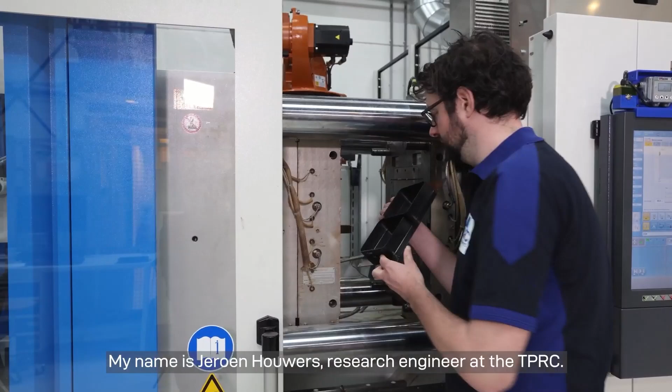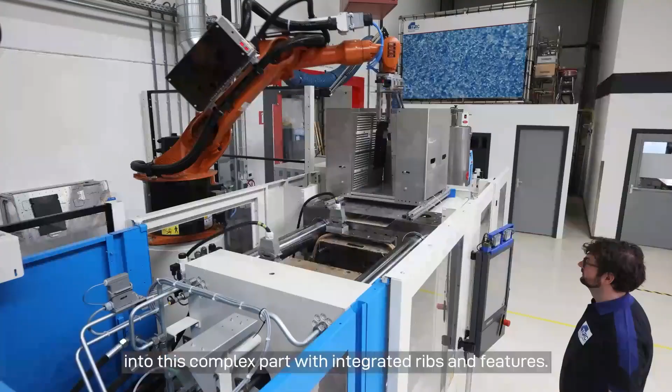My name is Jeroen Houwers, research engineer at the TPRC. Today I would like to tell you about the research into overmolding. Overmolding is a hybrid process which combines stamp forming and injection molding together into a single process. Within a few minutes we can transform this sheet into this complex part with integrated ribs and features. As a part designer, you can combine the strength of the thermoplastic composite sheet together with the design freedom of the injection molding process. However, there's still a knowledge gap to overcome to adopt this process in the industry.

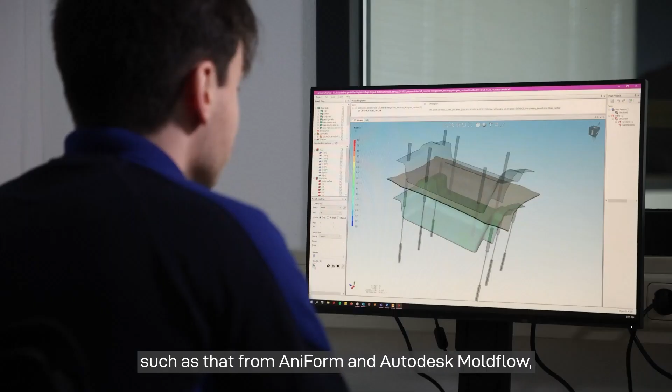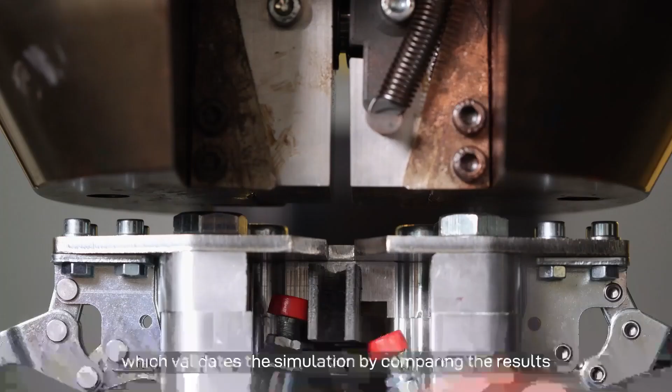In order to reduce the number of iterations needed and get first-time right tooling, we rely on a variety of simulation software packages, such as that from AniForm and Autodesk Moldflow, which we then couple together to simulate the whole overmolding process. The final step is to perform a structural analysis, which validates the simulation by comparing the results to the mechanical performance of an actual part. We're also researching the interface strength of different material combinations by performing tests on overmolded samples with different parameters. The aim of this is to standardize the process and, in the end, share the resulting datasheets with our partners.

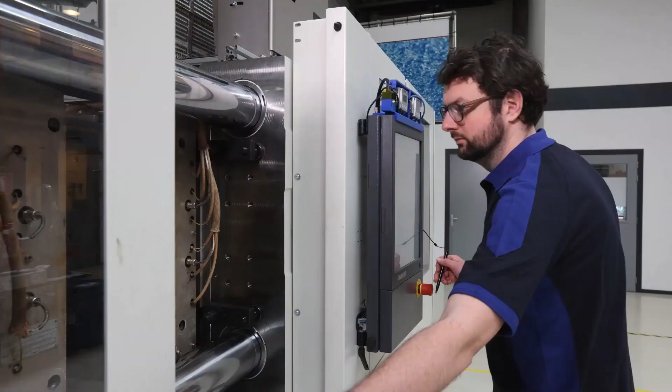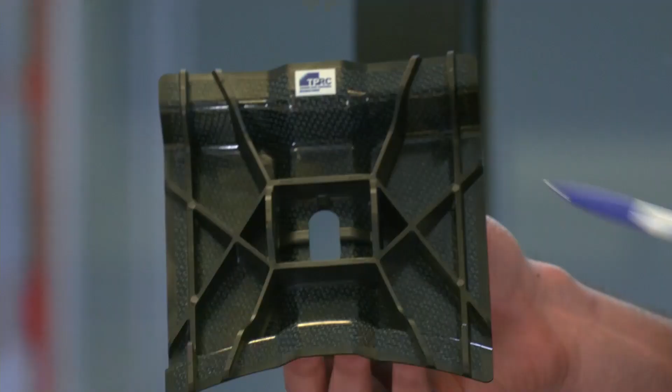Andres Garcia, what did you bring? Well, this is the complete demonstrator from our video. And what I'd like to show you today is, if you look here, for instance, at this place, and if you look under the microscope, if you make a cross-section out of it, then you can... perfect, you see the picture on the screen now.

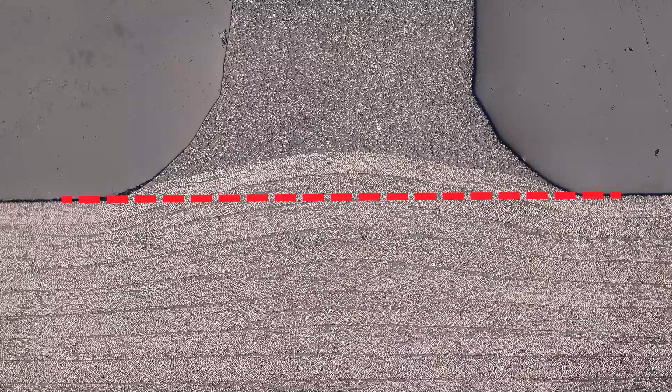What you see here is on the top, you see the injection molded compound, and on the bottom you see fibers. So what's happening here is that the fibers from the laminate are partially within the injection molded cavity. And this is what we're calling fiber migration.

And what's happening is that during the process, we heat up a laminate above its melting temperature, and then we place it in the injection molding machine, and the injection mold closes, and at that point the laminate reconsolidates. But at the locations where you have those ribs, you don't have any pressure at the moment. So what happens is that the fibers are pushed in the cavity.

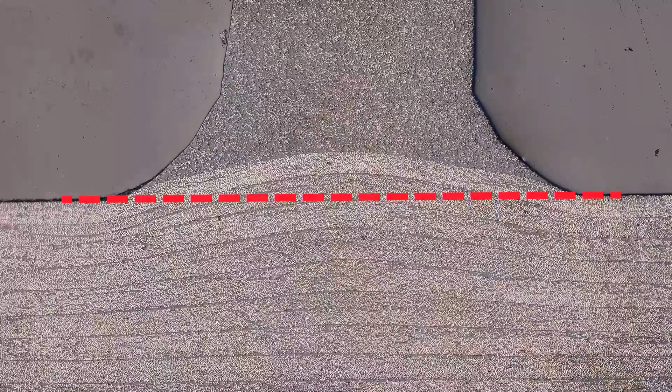We know that this fiber migration promotes the interlocking of the injection molding compound and the fibers, so it makes the bond a bit stronger. But on the other hand, it also influences the compression strength of the laminate. So there's a trade-off to be made, and we're working on tools to check how this fiber migration can positively or negatively influence your part.

Well, when it comes to injection molding, we do that for ages, right? Why is this still a topic? Well, there are two ways to look at this. One way, you can see overmolding as a method of increasing the strength and stiffness of a regular injection molded part. So you can place locally an insert in the part.

Or what you can also think of is enhancing stamp formed parts. For instance, this demonstrator here, we have a stamp formed part, and we can enhance this part by adding these ribs and features. And you can also think of mounting points to ease the assembly of the stamp formed parts. So there are multiple ways how you can use overmolding in your process.

So we've talked about the aerospace industry, we talked about the automotive industry, but there's a lot more potential, right? Battery boxes, gearboxes, electronics. What's the potential here? Well, overmolding has a huge potential because it allows to manufacture light yet strong parts at a very high volume, and they can also be quite complex.

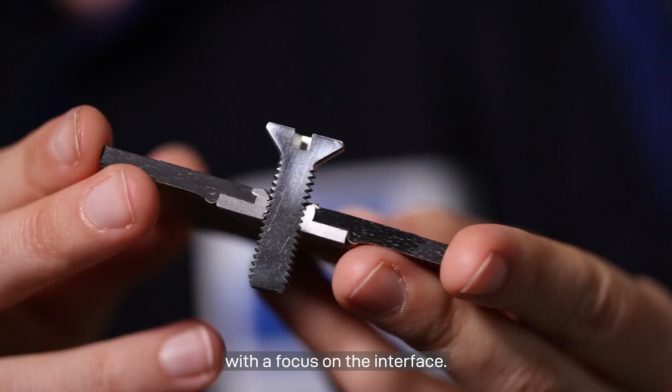My name is Vanessa Marinosci. I'm a materials engineer and PhD student here at the TPRC. My research is on metal thermoplastic composite hybrid joints with a focus on the interface. Currently, the standard joining techniques imply the use of mechanical fasteners or structural adhesives. But when using thermoplastic composites, we can think of a third joining technique, which we call co-consolidation.

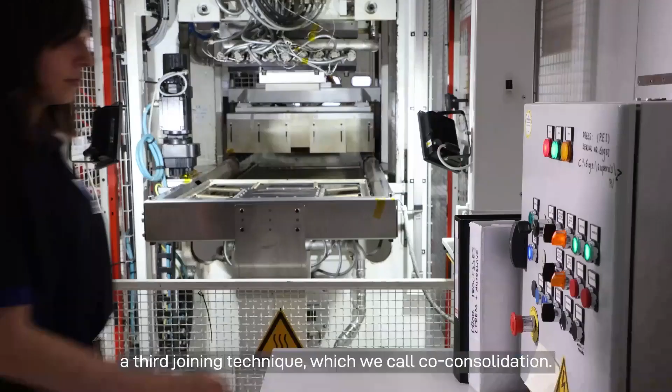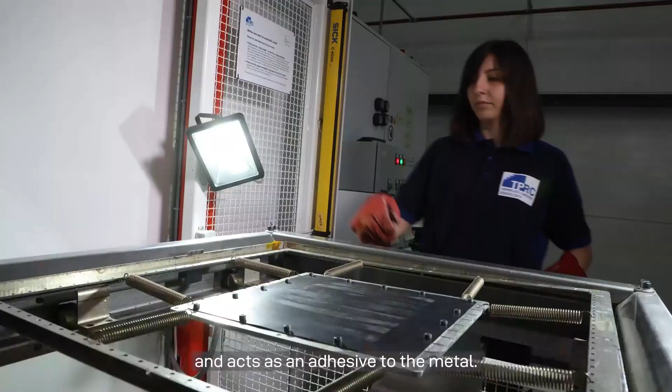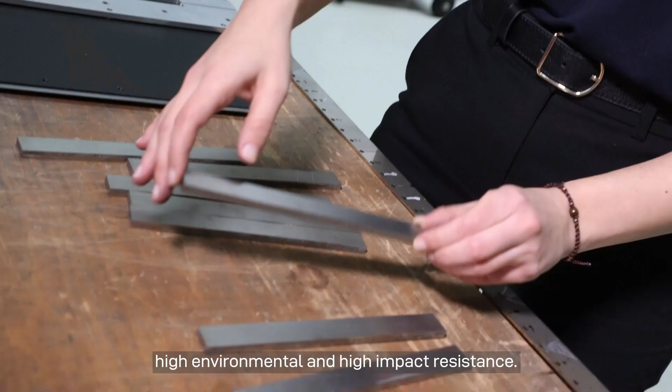With this technology, we can join thermoplastic composites directly to metals during a standard composite consolidation or forming process, because at high temperature, the thermoplastic matrix melts and acts as an adhesive to the metal. An example of a final product that we can obtain is a fiber metal laminate, in which, as you can see, layers of metal are alternated with layers of composite, resulting in a material with superior properties, such as high environmental and high impact resistance.

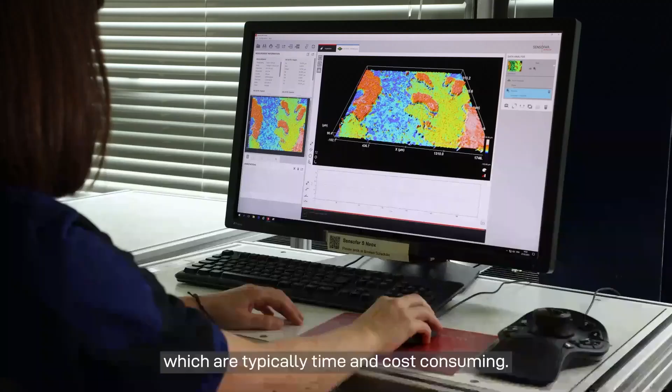Or another example can be a hybrid structure like this, in which a metal insert is already integrated into our composite structure. Therefore, this co-consolidation technology can potentially replace standard joining techniques, which are typically time and cost-consuming. To make co-consolidation a reliable technology, the key, but at the same time the challenge, is to have a proper understanding of the interface.

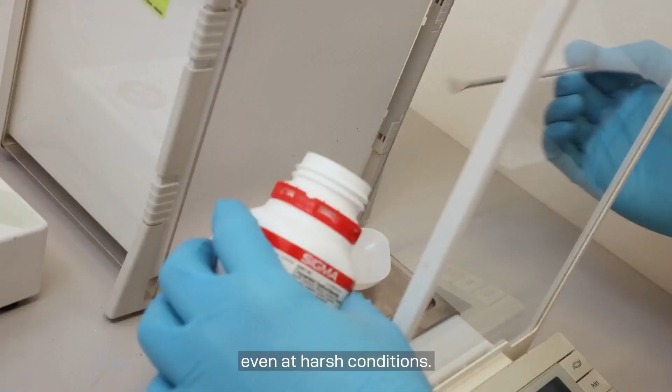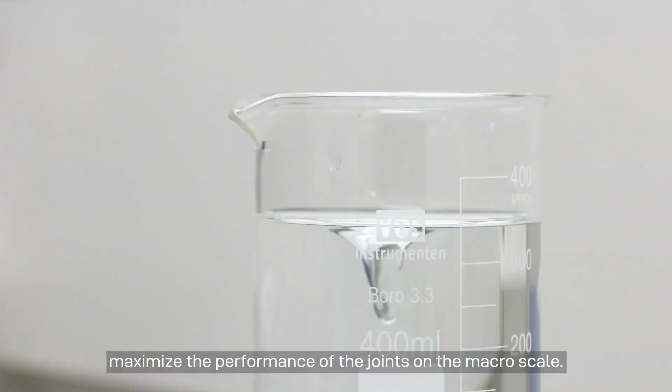Here at the TPRC, in order to tackle this objective, we are sharing our expertise with the expertise at the University of Twente. In this project, I collaborate with Yorgos, another PhD student, in order to approach this interface in a multidisciplinary way. In the metal surface preparation, prior to the joining process, we form thin films inspired by nature, and more particularly sea organisms such as mussels that are able to strongly bind on any surface even in harsh conditions. By incorporating different molecules in these nanolayers, we can tune their chemistry and result in stronger and more durable interfaces. By optimizing the processes at the nano and micro scale, we can maximize the performance of the joints at the macro scale. The aim of our work is to develop an essential and industrially relevant knowledge building block.

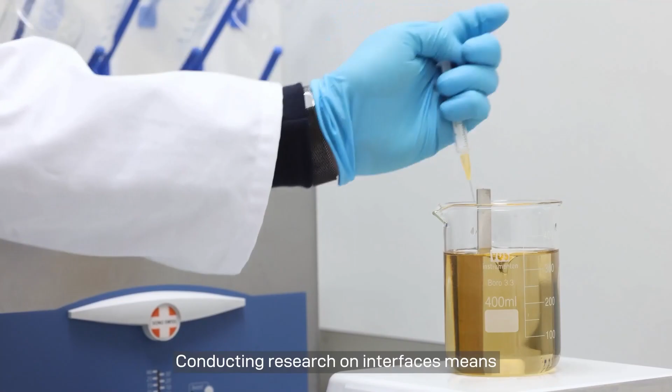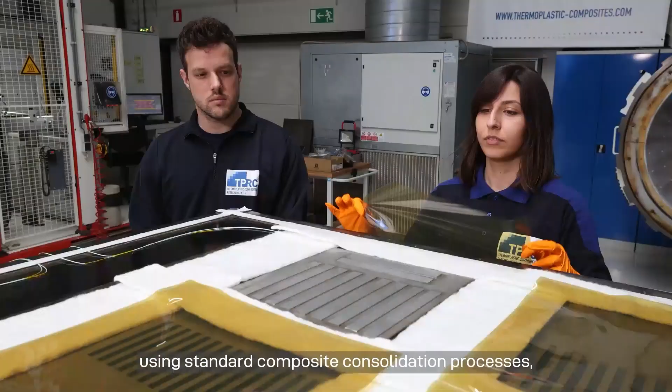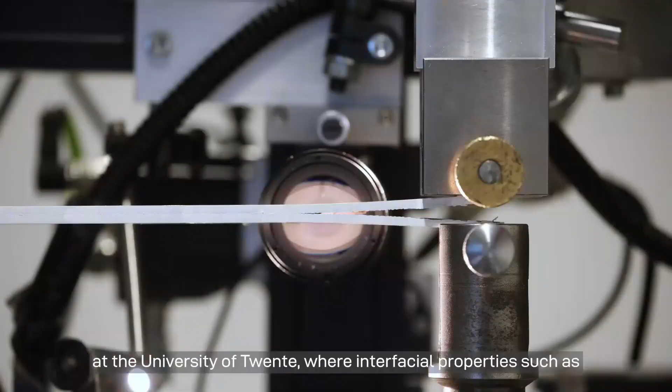Conducting research on interfaces means not just working on a part level, but also on a sample level, which is then mechanically tested. The preparation of these samples is made here at the TPRC using standard composite consolidation processes, such as autoclave or press forming. And afterwards, these samples are tested at the University of Twente, where interfacial properties such as Mode I or Mode II fracture toughness are evaluated.

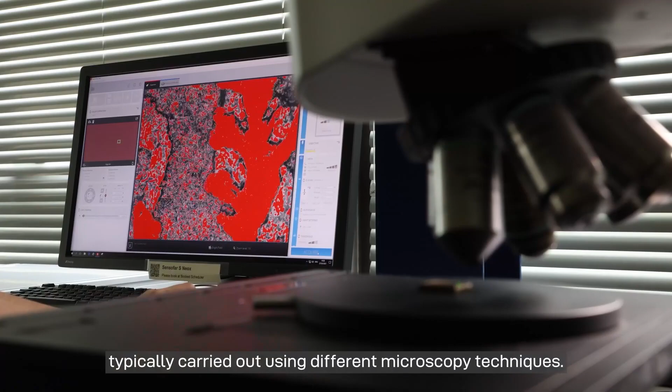Mechanical testing is always followed by an analysis of the failure mechanism, which is typically carried out using different microscopy techniques. Finally, our experiments are input for a numerical model, which enables us to predict the mechanical performance of the interface given certain surface conditions. In collaborating with Yorgos, we learn from each other, and that allows us to share more knowledge with the TPRC partners.

So Vanessa, this co-consolidation technique, do we see that already on the market? Well, not yet, but we do see that in a lot of applications, composite and metals are connected together. And this is currently done with well-established joining technologies such as mechanical fasteners, structural adhesives, or a combination of both.

But since thermoplastic composites are gaining more and more attention, we can exploit the moldable nature of the thermoplastic resin. And therefore, we can think of this co-consolidation technology as a potential replacement to the standard joining techniques, because in co-consolidation, consolidation of the composite and bonding to the metal are achieved in one step. And this, of course, will save time and cost that are typically related to the standard joining technologies.

So what do you think will be the first moment that we see this implemented? Well, difficult to say at the moment because there are many challenges and knowledge gaps. And what are the main challenges? At this stage especially, the biggest challenge is the interface. Because every time we deal with a new or a different material system, we have a new interface with different bonding mechanisms that can occur there. So if we don't understand and control this bonding mechanism, there's a high chance that the interface is the weakest link of the overall structure.

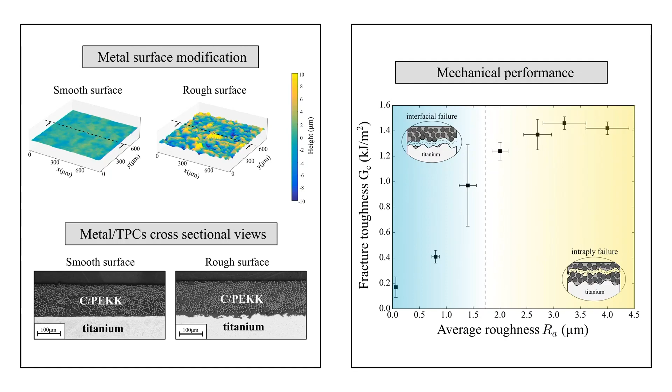Yes, so these images are a summary of one of my recent papers, in which I investigated the effect of this mechanical interlocking, specifically between titanium and carbon PEKK, manufactured with this co-consolidation technology. So how do you look at this technology for the future?

We are finding out that there's definitely potential in this co-consolidation technology. We managed to achieve quite a strong and stable bond between metal and thermoplastic composites, but of course this is just the first step. There's still a lot to do, because in order to build this knowledge of the interface, we mostly worked on a sample level, but now all this knowledge should be moved to a part level.

So it will be wise to start to work with parts that look more like real structures. And maybe also here start simple with secondary structures, see what the challenges are and how the structure responds mechanically, and then eventually move to primary structures. Interesting. Sebastian, from your perspective, how do you see that? I totally agree with Vanessa, of course.

So technology demonstration on the macro scale really goes hand in hand with fundamental understanding on the nano or molecular scale. You have to try things on the part scale to find out what works or not. Otherwise, with some interface development, you go into a certain direction, but it cannot be implemented in a real production situation. So that's iterating between these scales.